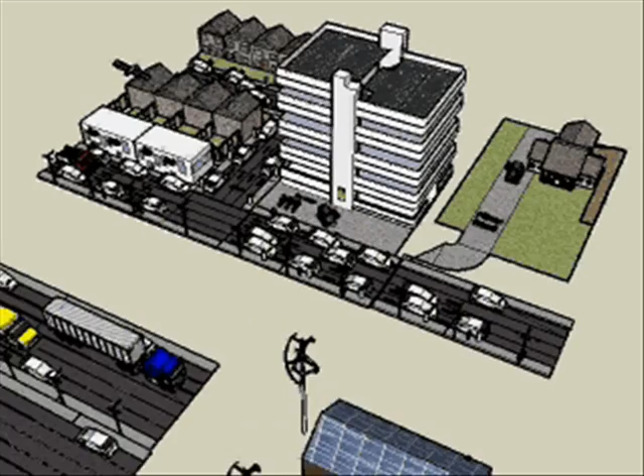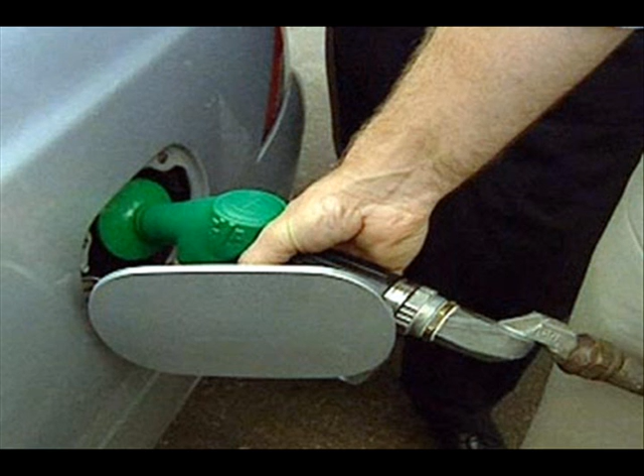Why? To tackle the increasing problems that the current system is having. The ECS has been designed to tackle the following: the lowering oil reserves to produce petrol for our cars, hence the massive increase on oil and petrol prices for consumers. According to reports, some suggest oil reserves will not meet demands by 2020.

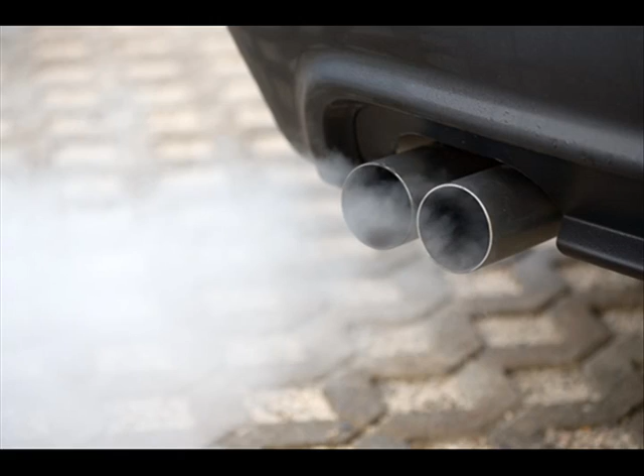Road safety. Road-related accidents are one of the highest causes of serious injury in the UK. Traffic offences. Traffic congestion. The environmental issues. Petrol cars contribute a great deal to global warming. Parking problems. And road noise.

To tackle these issues while keeping our existing road network, to limit the cost of this, is to design a new vehicle for British roads.

Meet the ECS car. It's a self-driven vehicle and half the width of the average motorcar. The reason for this will become clear as I take you on a demonstration of exactly how the ECS can tackle all of these road transport problems.

It's important for the government to take on an idea like this one and give the necessary investment. In fact, they will need to, to avoid a human disaster.

It is a system that can be phased in over a number of years across the UK, starting with chosen cities, perhaps by 2060. Before I show you how the ECS will work with the existing network and other transports, let me highlight the main points and aims of the idea.

It's a self-driven vehicle, so no need for a driving licence or taking a test. People as young as 10 can have their own designated vehicle. Each vehicle will have enough room for one adult and 2 or more under 10-year-olds.

Eliminate drink driving and speeding offences. Increase road safety by at least 90%. Greater energy efficiency over petrol cars. Vehicle made thin enough to enable the vehicles to park on the side of all B and A roads.

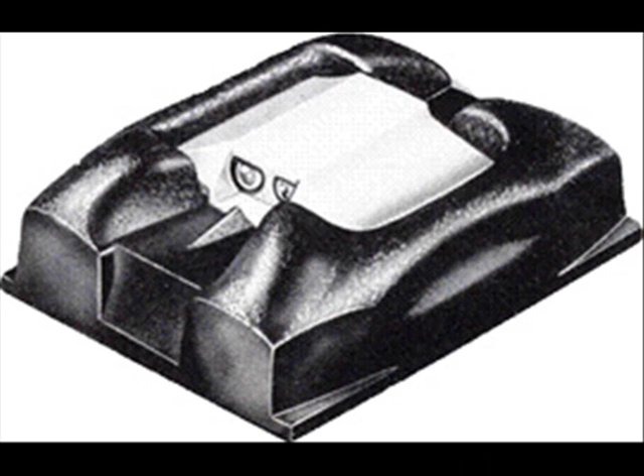If we could find a cheap and easy way of putting microchips into cat's eyes, this can be picked up by a vehicle using a scanner, just like we do with animals.

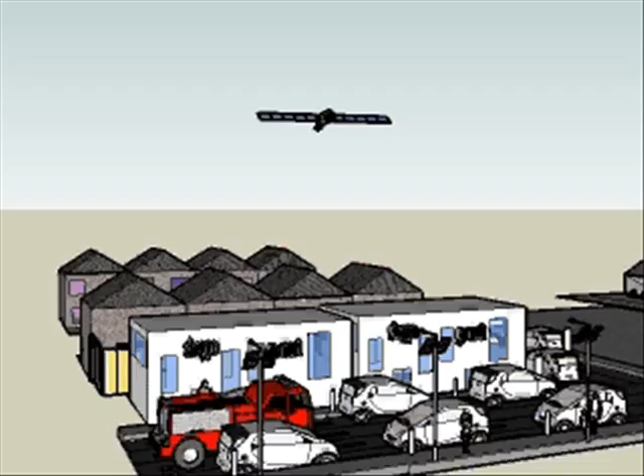Now, of course, we already have a way of telling you, or in this case the car, where and how to get somewhere using satellite navigation systems. These systems can be used to tell the vehicle where it is to travel to by the passenger before departing. However, this could also take the place of putting microchips in cat's eyes and saving the cost, as satellite navigation technology is advanced enough, possibly, to be able to steer a car through the roads safely.

Take the cybercar shown earlier. This vehicle has onboard laser and radar technology to detect obstacles in its way, i.e. someone running out in the road or other vehicles, much more quickly than humans could manage to respond.

However, using these technologies also helps reduce congestion, as described here with the cybercar. Instead of having 2 seconds between vehicles, we can have 0.5 seconds between vehicles, so you can multiply by 4 the number of vehicles going through a highway, with maximum safety.

Now, with all of these 3 different guiding technologies on board the vehicle, there's no need for traffic lights or road signs. Each vehicle will be able to communicate with each other, telling each other where it is going, perhaps via a Wi-Fi radio communication link. So there would be no collisions at crossroads, for instance.

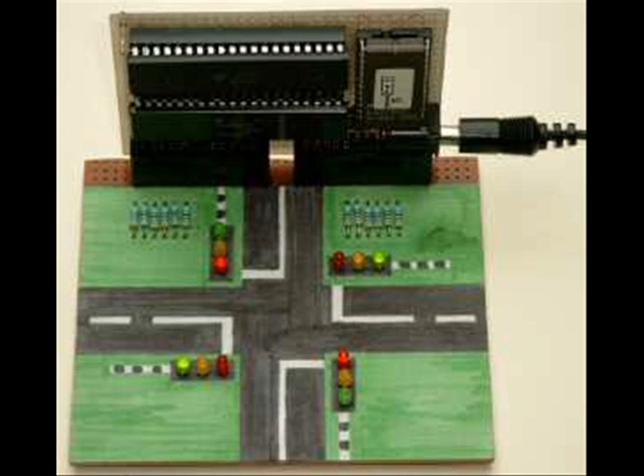There can be computers installed in junctions that can also direct vehicles and tell them when they can go, a bit like how a traffic light system would work, prioritising according to perhaps how long a vehicle has to wait or slow down for its turn.

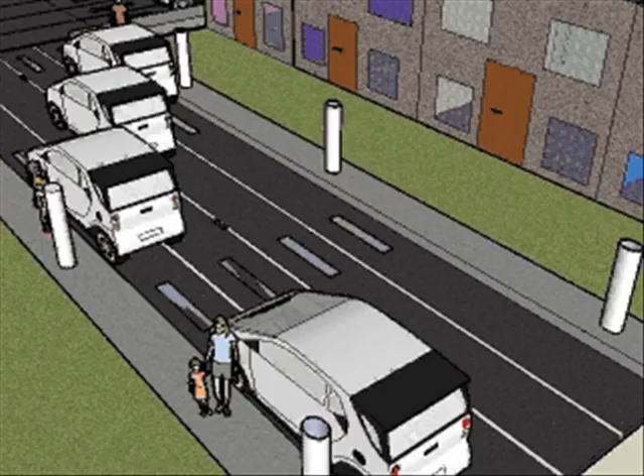The vehicle will have wheels that do a 90-degree turn so it can park on the side of the road quickly and easily. An electricity supply will be given along every stretch of road, with each spacing or parking spot having a charging point and enough space between each parked vehicle for a pedestrian crossing.

This will include a button to press on the charging point to stop traffic at any time to safely cross the road. A radio signal will tell the vehicles to stop when the button is pressed.

Each time a vehicle parks at one of these charging points, the charger will connect to the vehicle automatically to charge the vehicle's battery. It's always a good idea to keep the car's onboard battery topped up. The electricity supply will be paid for like any other public service, through council tax, for instance.

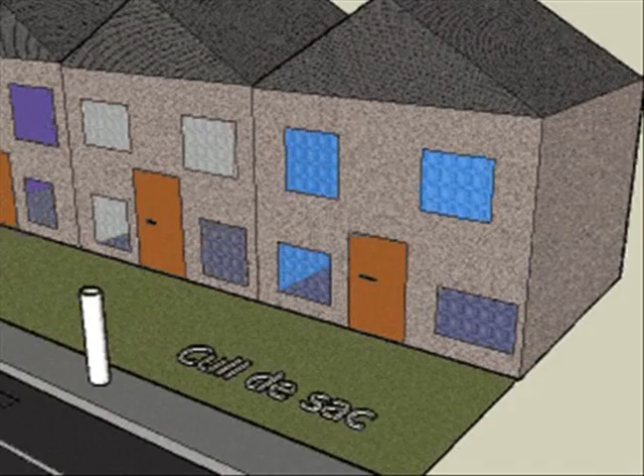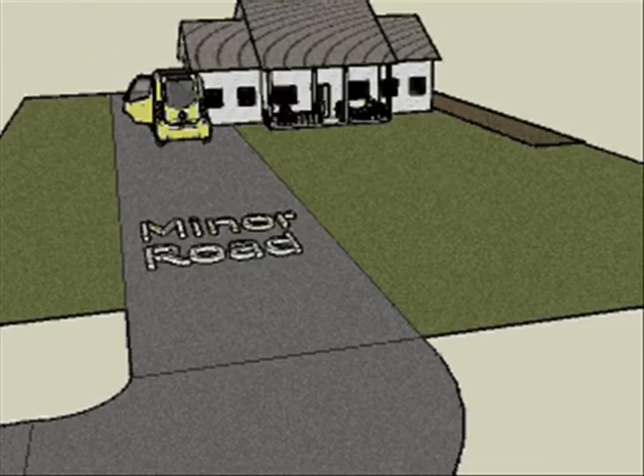Every road with the ECS will be able to turn down into cul-de-sacs for parking at your house or business. However, minor roads will not allow the ECS. Therefore, if your destination, home or business finishes at the end of a minor road, the vehicle will park to the nearest available spot, including car parks if necessary, on an A or B road.

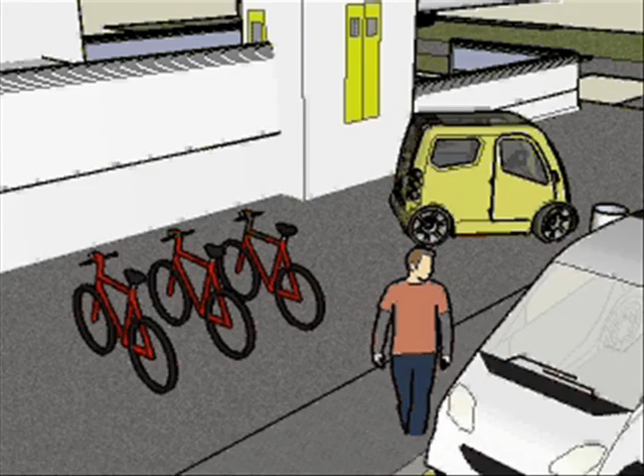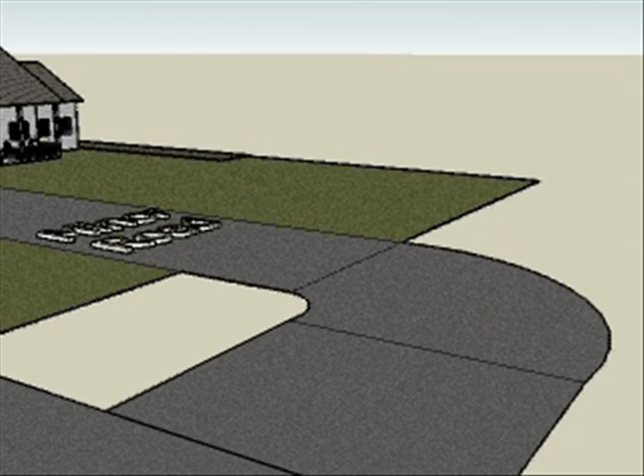Therefore, passengers will have the choice to walk, cycle to their home or business, or even use a golf buggy type of vehicle, a bit like the Fiat Pogo here. This vehicle has a maximum speed of 20 to 25 miles an hour and will be useful if you're carrying some objects. This vehicle can be safely used by anyone over the age of 16.

In towns and city centres, no parking will be allowed on the side of the road. Instead, the outer of the 2 lanes will drop off passengers and then the vehicle will park itself at the nearest car park. Passengers will then mobilise their vehicle to come and collect them from a drop-off point.

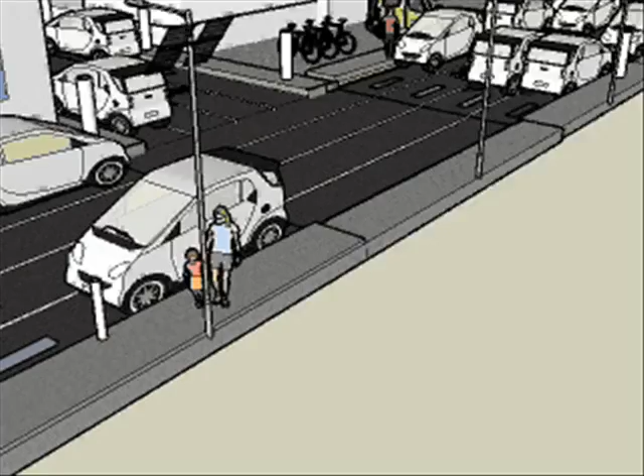The ECS vehicles will automatically park on the nearest free spot in both directions to allow passing of modified emergency and essential freight petrol vehicles through the centre of the road. Special licenses will be given to a small number of drivers of these modified petrol vehicles that the ECS cannot cater for.

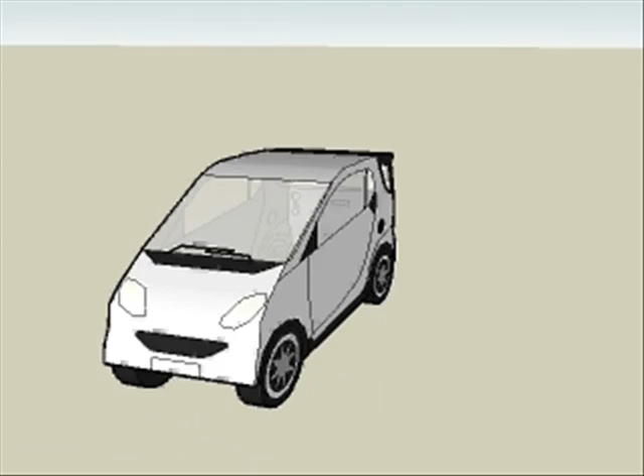The ECS will be able to have transporter type vehicles to deal with the majority of small to medium sized freight, coming mostly from our local train stations.

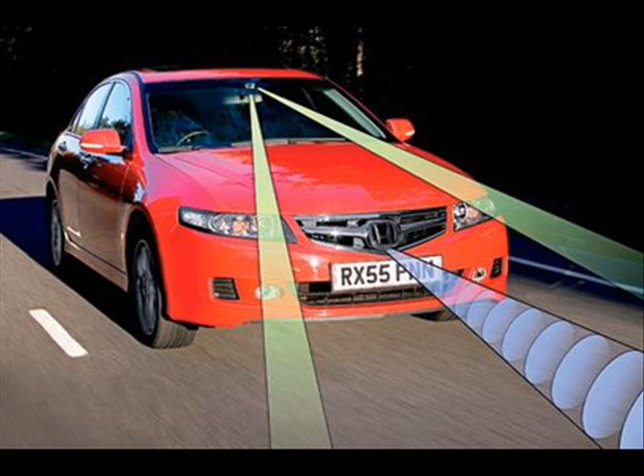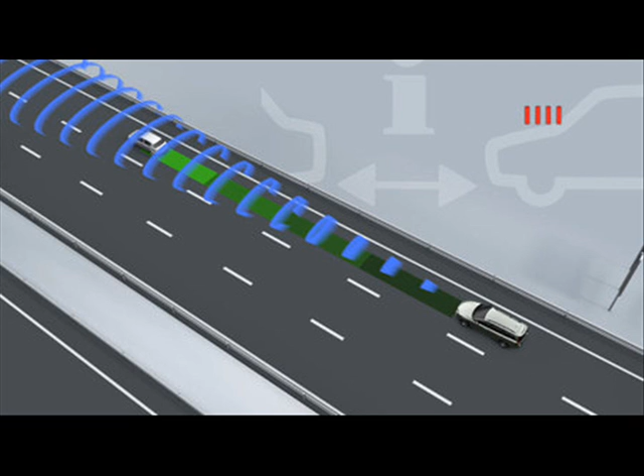The petrol vehicles will be modified with laser and radar technology for maximum safety, as well as radio communication with the ECS vehicles, so they know in advance to park on the side of the road to get out of the way. Now, each petrol vehicle will need to enter their destination on the satellite navigation system, just like the ECS, before departure, so each vehicle knows exactly where they're going.

Now, in the rare event 2 petrol cars going in opposite directions are going to meet on the same road, advanced warning will be sent to each vehicle, telling the other to pull over on the side of the road to let the other one through. Of course, emergency vehicles will always be given the right of way.

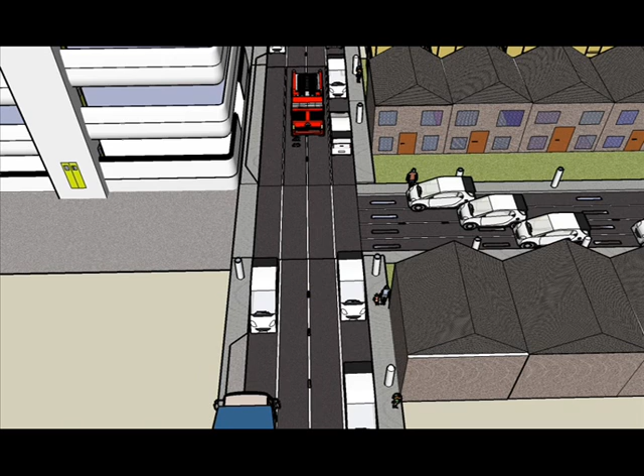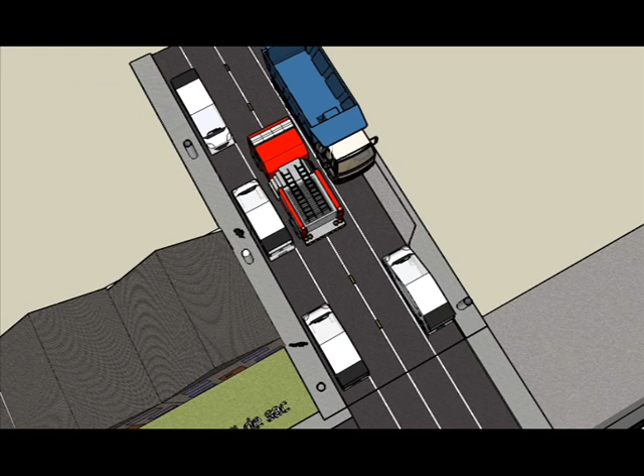Now, along most of the B and A roads where this might occur, spaces or laybys will be created for these petrol vehicles, trucks and lorries, for instance, to pull over to one side. These spaces will mean no parking for the ECS. The laybys or spaces can be put along these roads, apart from maybe small villages, etc., where every space will be needed for ECS parking, for instance.

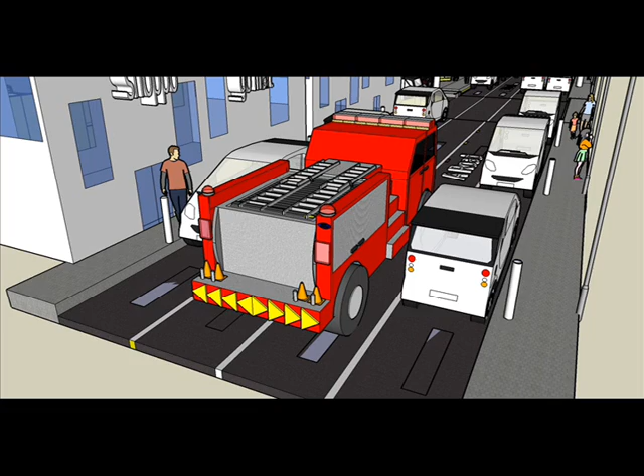But each petrol vehicle will be given plenty of warning of any oncoming petrol vehicles so that it can pull over in plenty of time before entering a small village, for instance.

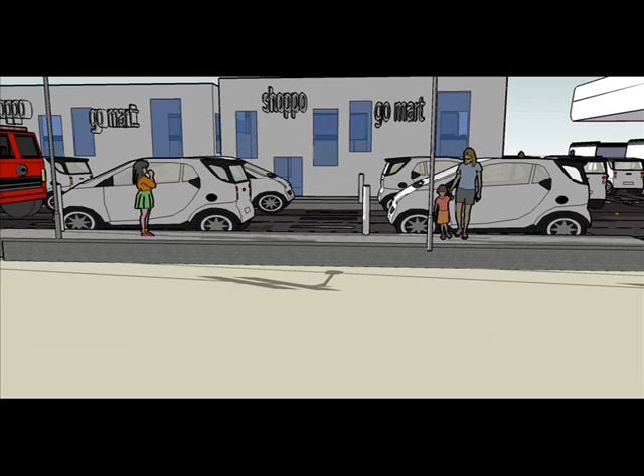Children from 10 years old can either be monitored by parents from a home computer or still be travelling with them, just in another vehicle. Talkback systems can be installed to allow for communication between vehicles of family members travelling with you.